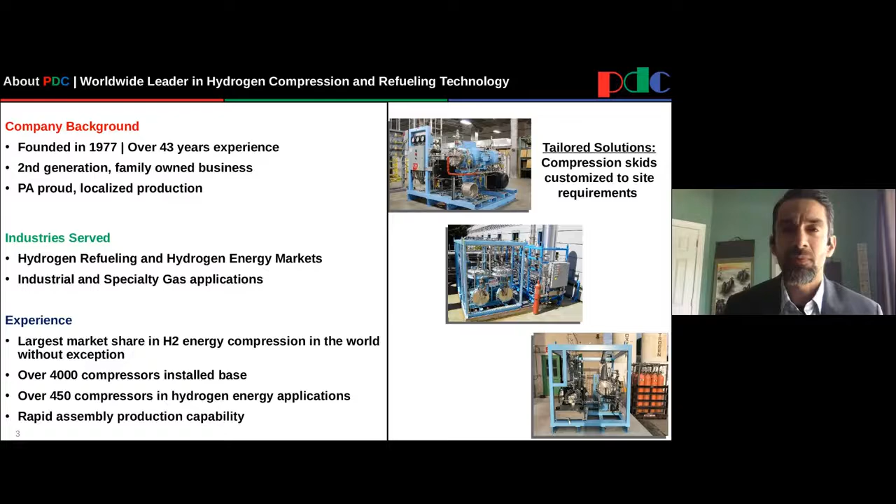We have the largest market share in compression applications worldwide in the hydrogen business, with over 450 in energy applications throughout the world. We also have an installed base of over 4,000 compressors in our product portfolio dating back to our founding.

And now PDC is ready to bring scale to production to the markets that we serve. Partnering with IVYS Energy Solutions, who brings over 30 years of integration and development experience for various hydrogen solutions, they've partnered with PDC to bring sales, manufacturing, and service of our SimpleFuel product and other hydrogen solutions to the industry.

And now I will give a short video description of our diaphragm compression technology.

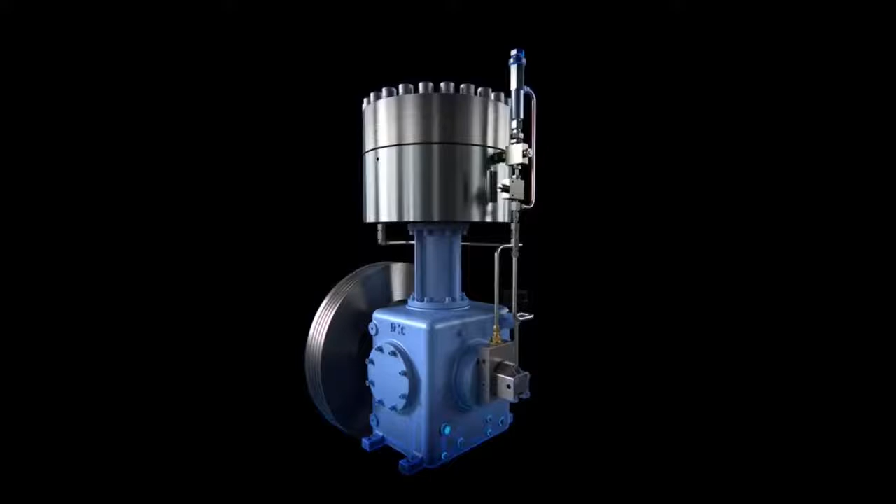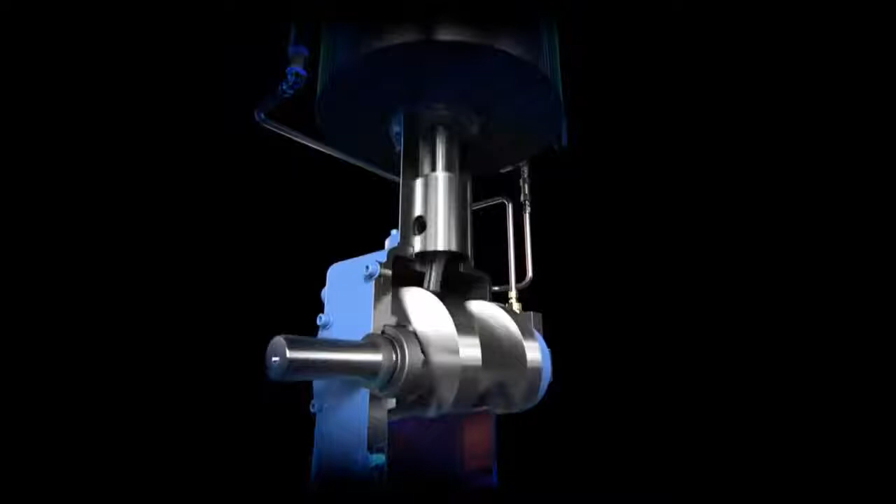Diaphragm compression is based on a reciprocating style piston compressor technology, which is based on a traditional crank mechanism, which oscillates a high pressure oil piston, which moves a high pressure hydraulic oil in a controlled cavity.

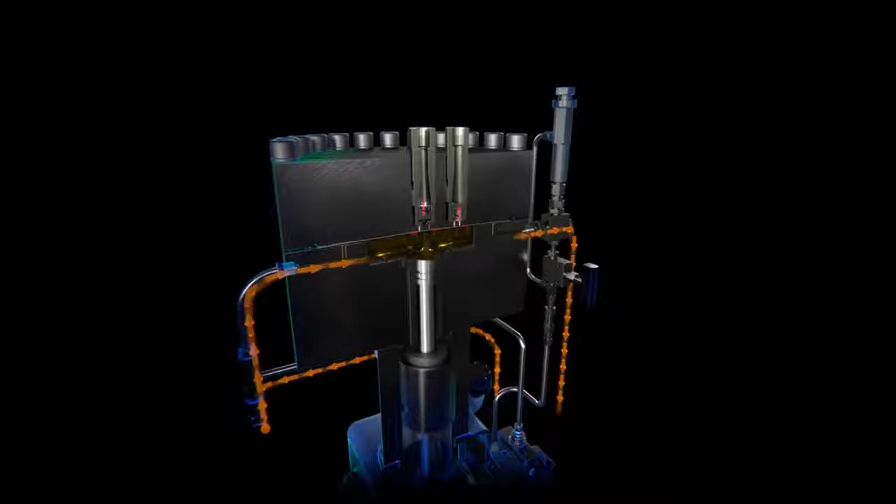A triple set of metallic membranes are captured between the flanges and only have static seals, which ensure that we do not have any contamination of the hydrogen or any of the other rare gases that we compress. We have integral systems to ensure that we always have prime to the system to ensure high energy efficiency of the compression that we do.

PDC has a really detailed hydrogen vision, and really what we are looking to do is cultivate a business platform that propels fuel cell vehicle usage and hydrogen energy applications through the deployment of world-class infrastructure and service.

And we do this with a hyper laser focus on customer and market focus. At PDC, we listen to our customers and the market to design products that solve problems, and then we create solutions to solve those dedicated customer problems.

And we do this by providing world-class product to the world's codes and standards. Anywhere in the world, we can deliver a product to that code and standard for a lifetime of use. And we truly have world reach.

We have offices on 4 continents with dedicated sales, service, and support offices in every region that we serve, from PDC China to PDC GK in Japan, PDC Korea, PDC US, and soon to becoming PDC in the European Union.

And our product has world reach. Here we have some of our high-profile projects through our partners around the world, from China and Korea and Japan through the European Union and the US, filling cars, trucks, buses, forklifts, trains, and various other applications in the hydrogen energy world.

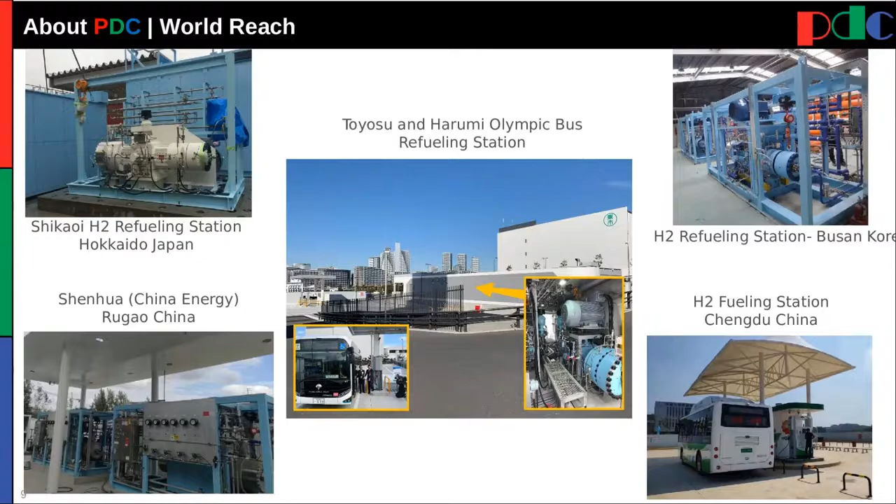At PDC, we deeply believe that partnerships are what is going to bring hydrogen to scale. I've just talked about our partnership with IVYS Energy Solutions, as well as PDC has a strategic partnership as the exclusive licensor of Argonne National Labs' patent for hydrogen refueling station control algorithm called pressure consolidation. If anybody has questions about that, we'd be happy to receive an email to talk about that.

In February, PDC launched with the Philadelphia Eagles, a partnership that I'm really, really excited about as a lifelong Eagles football fan. We are the proud partner of the Philadelphia Eagles, where we will be bringing a SimpleFuel refueler and various hydrogen technologies to their day-to-day operations.

And then PDC has various regional partners through our offices around the world, bringing PDC technology with their local expertise and localization efforts to those local markets.

Our partnership with the Philadelphia Eagles is part of their Go Green campaign and their sustainability program. And what PDC will be doing is providing a SimpleFuel hydrogen refueler to their football stadium, Lincoln Financial Field.

It'll be adjacent to the stadium, and it'll be refueling a fleet of material handling equipment, hydrogen electric carts, and hydrogen fuel cell vehicles. And we're really, really excited about this being potentially the largest pop culture user of hydrogen anywhere in the world.

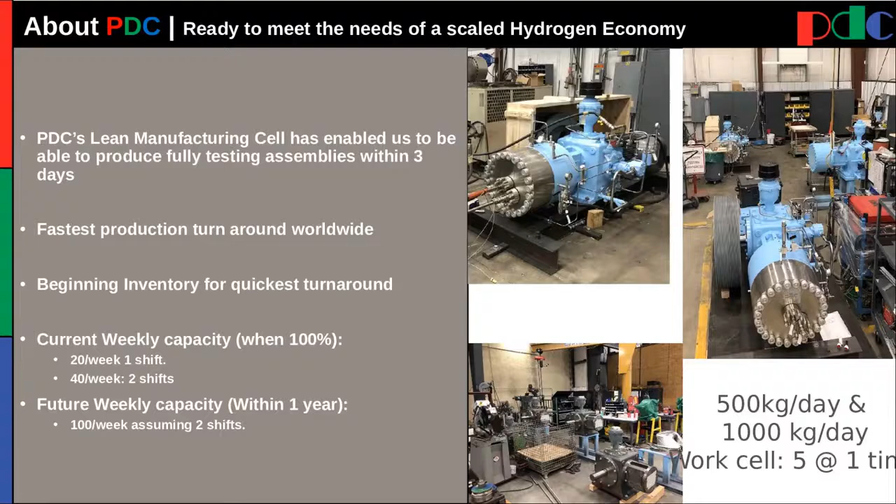In a year or so, we'll be able to produce over 100 compressors per week throughout our 3 manufacturing facilities. And it's something we're very excited to be able to bring to the hydrogen market. And now we will go on a virtual tour of PDC's manufacturing facilities.

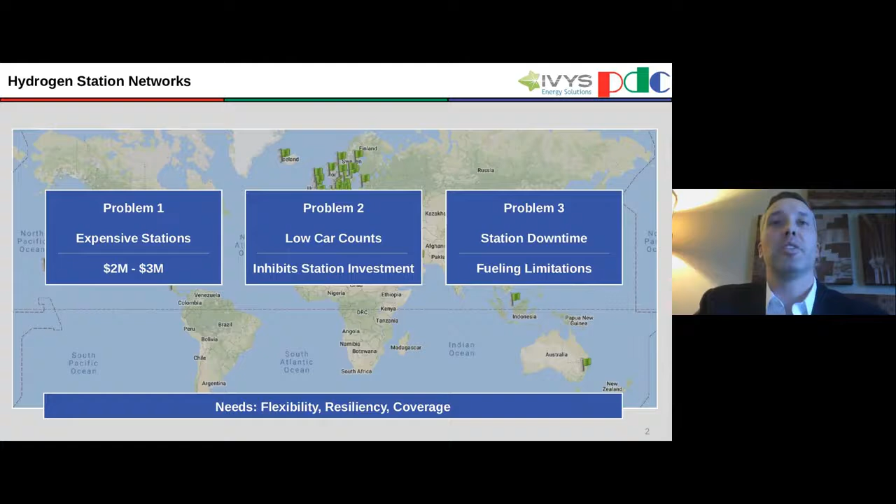Drivers want to be able to fuel their car without traveling long distances to a station. So, to accelerate the adoption of hydrogen vehicles, flexible and resilient station networks are needed.

It's very clear that large refueling stations capable of fueling many cars per day will be critical to the widespread adoption of fuel cell vehicles. But what if there were simplified stations to support early growth? What would those critical features be?

A smaller number of fills per day would reduce CapEx. On-site production gets rid of deliveries. Minimal setbacks allows the station to be located almost anywhere. And if you look at the reliability issues of these large stations, the chiller is the biggest issue.

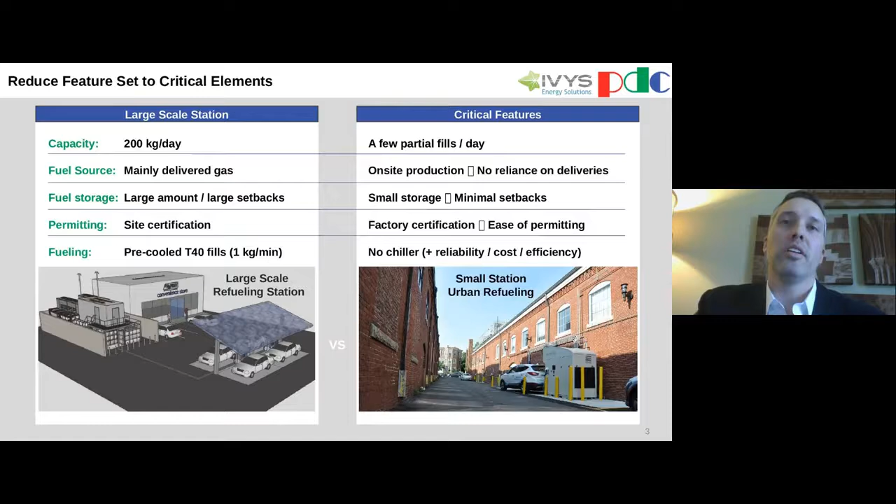Eliminating the chiller improves reliability, reduces cost, and reduces energy usage. Without the pre-cooled hydrogen that the chiller provides, the filling times are longer, but that's not the priority in a resilient network. What's most important is that the hydrogen is available and drivers can continue to fuel their vehicles.

With that in mind, let's look at an example of what we envision for improved network resiliency. In Long Beach, there's a hydrogen station at the AM/PM. If the Long Beach station is not available, the next station is in Torrance, about 15 minutes away.

For the price of 2 full-size hydrogen stations, we can blanket the area with 12 SimpleFuel stations at convenient locations like grocery stores, hardware stores, and office buildings. With quick top-offs available, we expect each station to handle about 10 to 20 cars.

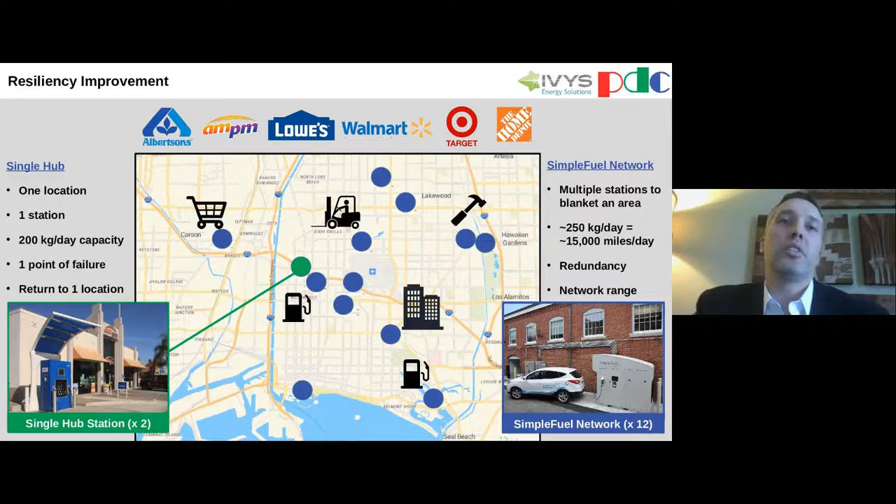So think about this. The network of SimpleFuel stations could help improve demand and justify investment into larger hydrogen stations. Then, when they've served the purpose, some of the SimpleFuel could be moved to new locations to expand the coverage area.

We're getting a lot of interest from customers who want to use SimpleFuel to create green hydrogen for their fleets. Directly connecting to renewables, such as solar and wind, gives customers a true option for zero-emission fuel.

One example, the Philadelphia Eagles will deploy a SimpleFuel at Lincoln Financial Field to fuel some of their fleet. The team has 11,000 solar panels on their stadium to enable green hydrogen production. A second example, Greentown Labs uses a 200 kilowatt rooftop solar array and energy storage to power a SimpleFuel in Boston. Chris O'Brien will provide a virtual tour of this installation shortly.

Renewables offer electricity as low as 2 or 3 cents per kilowatt hour. With SimpleFuel, the all-in hydrogen cost can be as low as $9 a kilogram, lower than what you would find at current retail stations.

Uptime is critical to the success of the hydrogen network. All SimpleFuel stations in the field are connected over the internet and remotely monitored continuously. This allows our service teams to diagnose issues and respond quickly, but it also allows us to predict and fix issues before they result in downtime.

Our Kessen site in Japan is a testimony to how well this works. The site is so remote it takes 6 hours for field technicians to reach it, yet the station has run with extremely high uptime for the last 2 years.

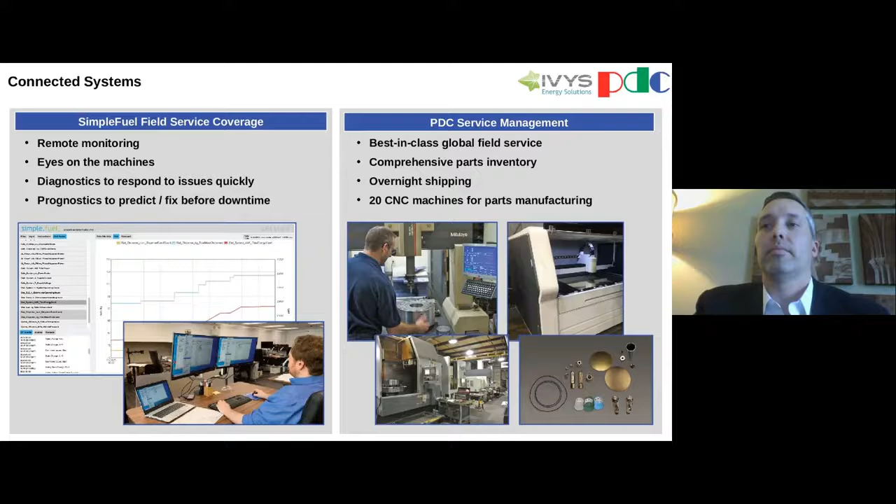Now, we'll show you an animation of how SimpleFuel works.

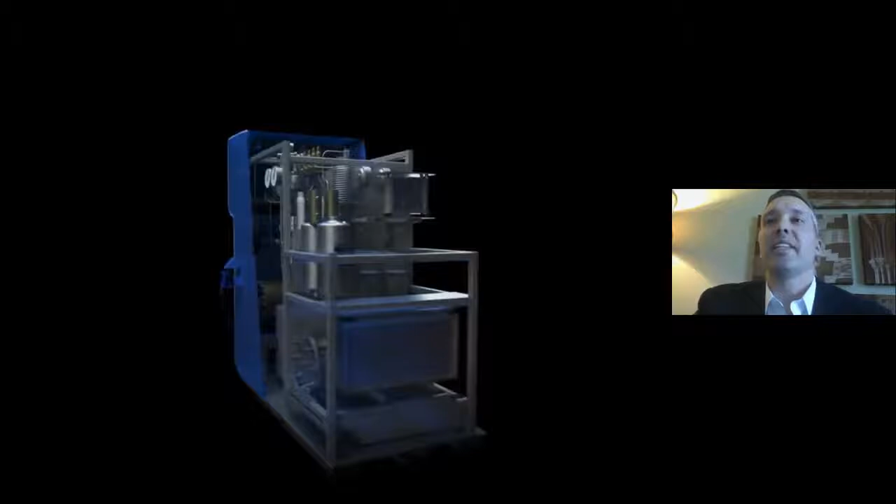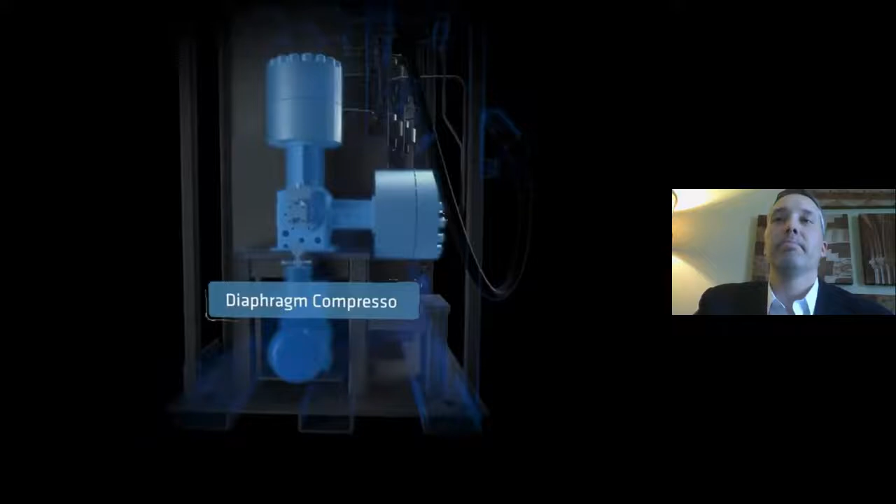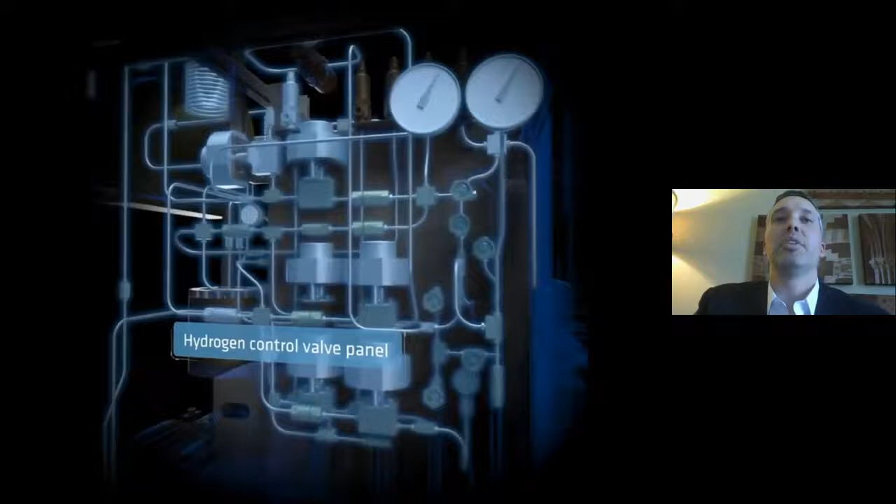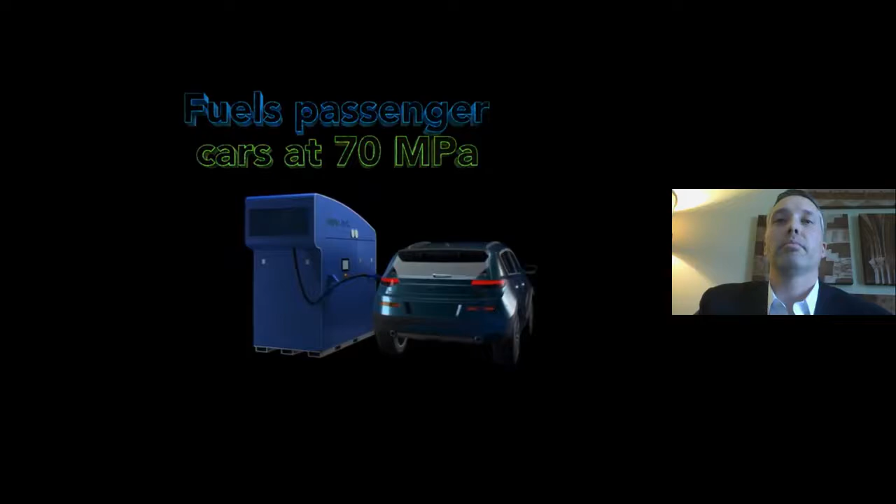A firewall around the storage enables SimpleFuel to be sited directly adjacent to a building. The PLC, valve panel, and instrumentation safely control the rate of hydrogen flow to the vehicle tank. The nozzle dispenses to a 350 bar vehicle in as little as 2 minutes per kilogram, and to a 700 bar vehicle in as little as 10 minutes per kilogram. External storage can be connected to SimpleFuel to improve dispensing times.

So back to the slides. The last slide I have for you is a high-level spec sheet. SimpleFuel is capable of 20 kilograms per day, which is the equivalent of 1,200 miles. It takes 480 volts AC power and converts it to the electricity needed by the stack, controls, and safety components.

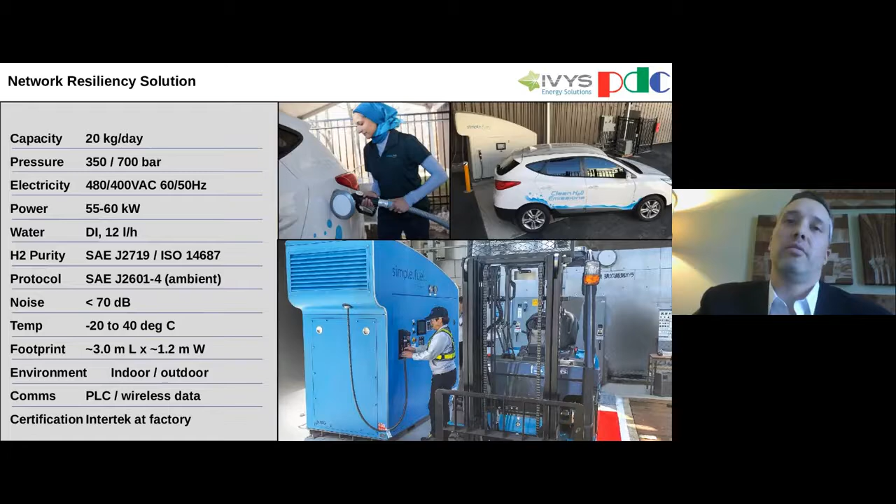SimpleFuel is quiet enough to be located anywhere. For installation, the footprint is smaller than the car it is fueling. With forklift provisions in the frame, it can be relocated as the hydrogen network grows. As hydrogen mobility expands, there will inevitably be some issues. But when those issues come up, SimpleFuel can help provide the resiliency needed to keep customers adopting fuel cells.

And now we will see the aforementioned virtual tour of the SimpleFuel installation at Greentown Labs.

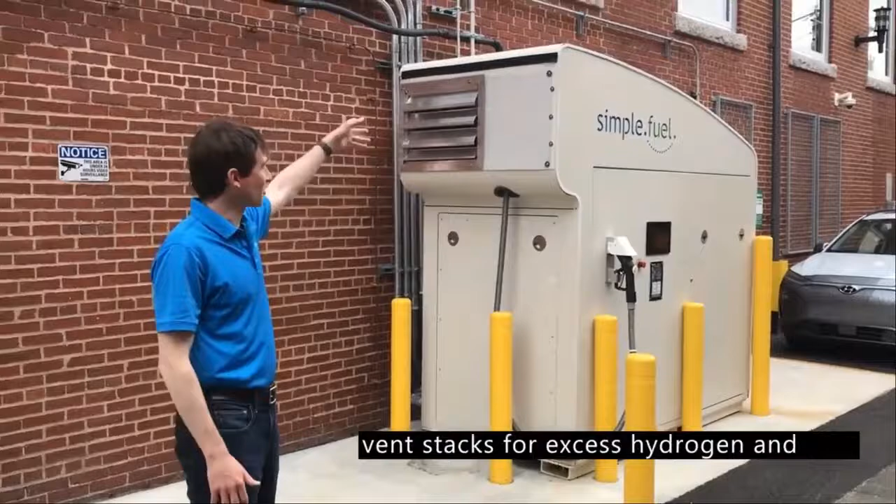The installation is pretty straightforward. We have our electrical cabinets, which have 480 volt power coming in. That electrical goes over to the SimpleFuel unit. We also have water that's coming from inside the building, and both the electrical and water run over into the main enclosure here. From the main enclosure, the only outputs are the nozzle to the car and vent stacks for excess hydrogen and oxygen going up to the roof.

Maintenance is also very straightforward. We have a compressor, we have an electrolyzer. The compressor has a 6-month service - replace the oil, nothing complicated. The electrolyzer is serviced once a year, where we replace electrolyte. Again, something that can be done in about an hour by trained technicians.